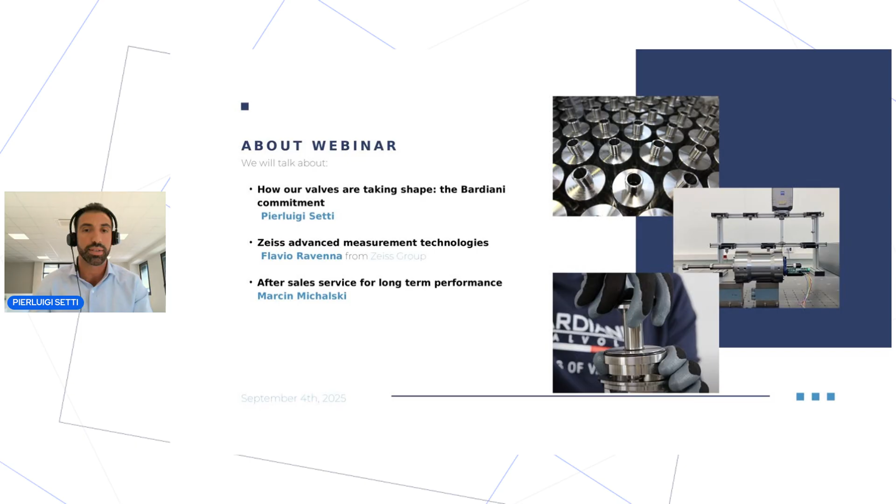So let's start from the beginning, from where our quality starts - the machining process. All the parts in contact with the product are machined from solid bar with no welds, specifically AISI 316L material. Why is this so important? Because we are able to get stronger and more consistent parts. This means no welding points, no casting, no weak points.

I like to share this example. One of our customers, with a frequency of 2 years, keeps looking for replacement seals in order to keep his line running. The interesting part is that these seals belong to valves that Bardiani sold in 1994 - that's 31 years. I can assure you this is not a unicorn case, not a coincidence. This is the result of how we build our products.

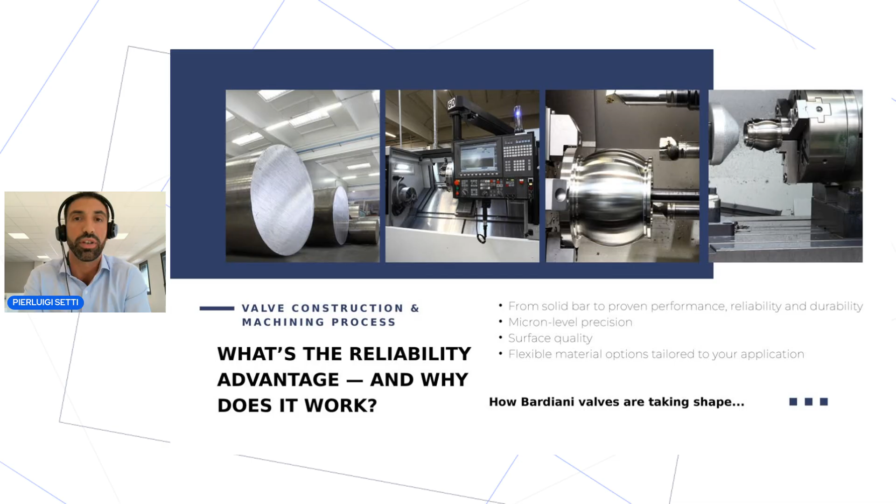Last but not least, flexible material options. I mentioned AISI 316L material as standard, but based on the specific requirements from our customers linked to their real application, we can also propose SAF 2507, 2205, Hastelloy, 904L - a really wide range of options that are part of what I like to call our Bardiani flexibility package. The interesting part is that we do not need any minimum purchase quantity required. We can even design and propose you a single valve with this material.

Okay, so now let's take a quick look behind the scenes and see what happens after the machining, including some key factors related to our products.

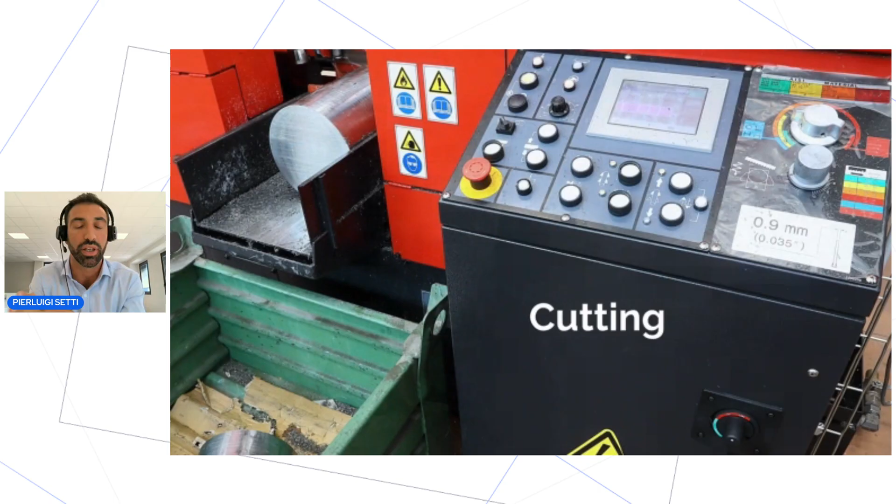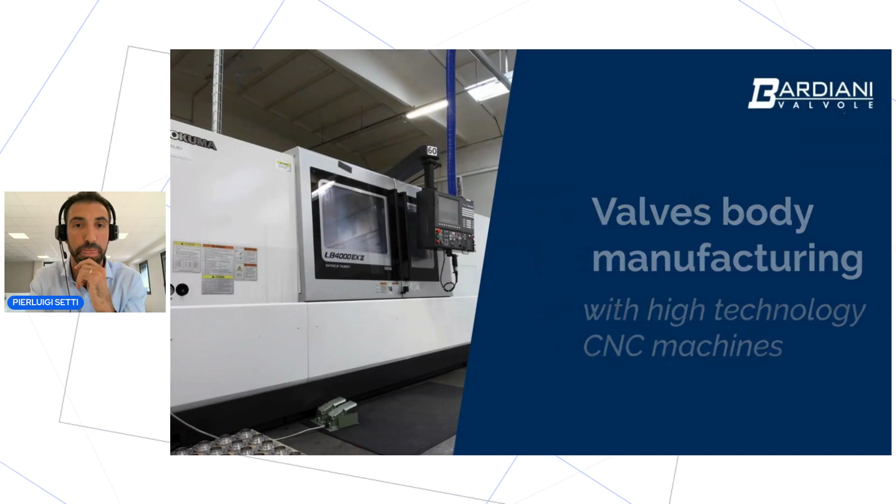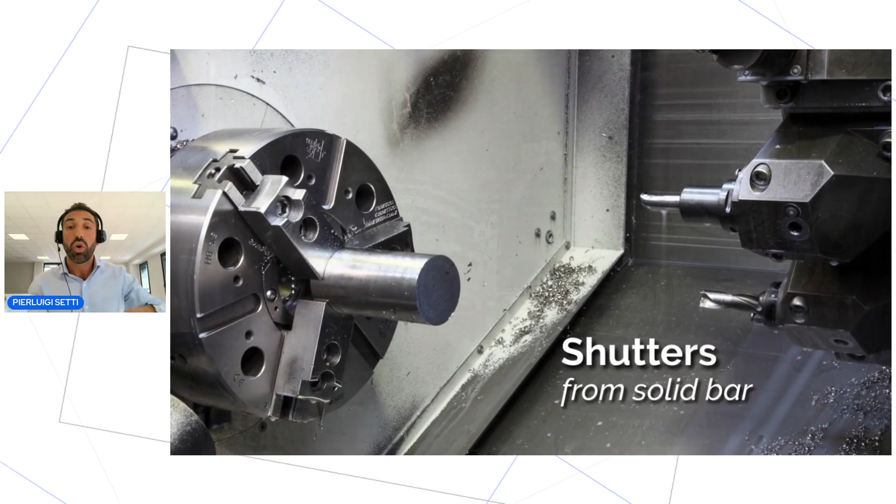So here our Bardiani valves are taking shape. I mentioned the bars, and then the process starts with the cutting. The parts are ready to be manufactured through our high precision CNC machines. We machine both bodies and shutters up to semi-finished parts, because we keep them in stock in our warehouses in order to always guarantee an efficient and performant lead time to our customers.

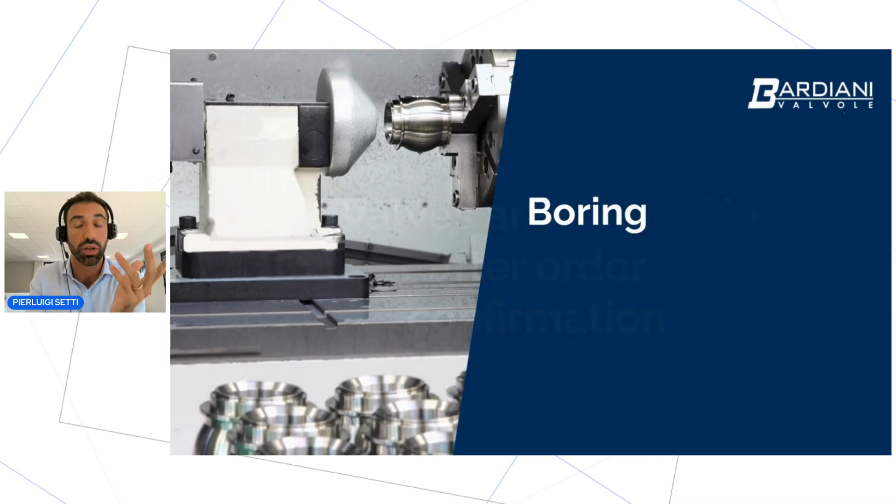We also have vertical automatic warehouses where we keep individual seals or complete service kits. Then the valves are finalized after order confirmation, going through the boring operation, the welding phase, and the polishing.

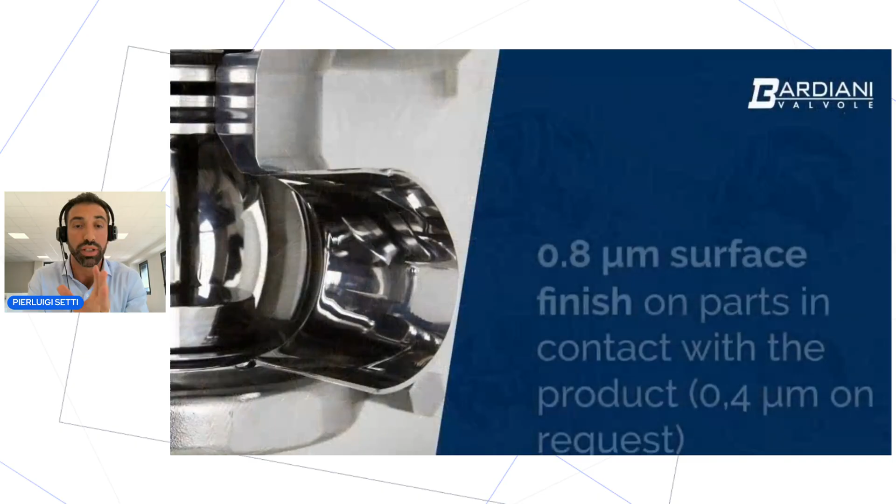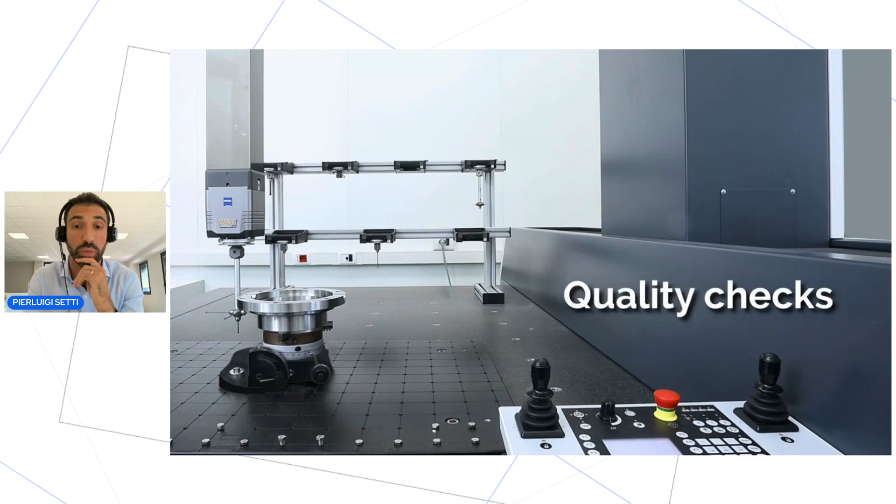As mentioned, our internal surface finish after machining is already lower than 0.8 micron, but for a dedicated request, specifically for the pharma sector, in most cases we can reach 0.4, 0.2 micron. Everything always passes through quality checks, external and internal, assembly, and packing phase.

Okay. So high quality, of course, doesn't come only from the machining. It's an important part, but another important part I would say is the step-by-step prototyping quality control.

This means that basically for dedicated solutions or for new types of valves, we process a step-by-step quality control, starting from the incoming material checks through the in-process dimension quality checks with tight tolerances until the full 100% final inspection. So we are really sure, if we talk about one project, because we can propose this also based on one single project, that really the first valve is exactly the same, even with similar tolerances compared to the last one.

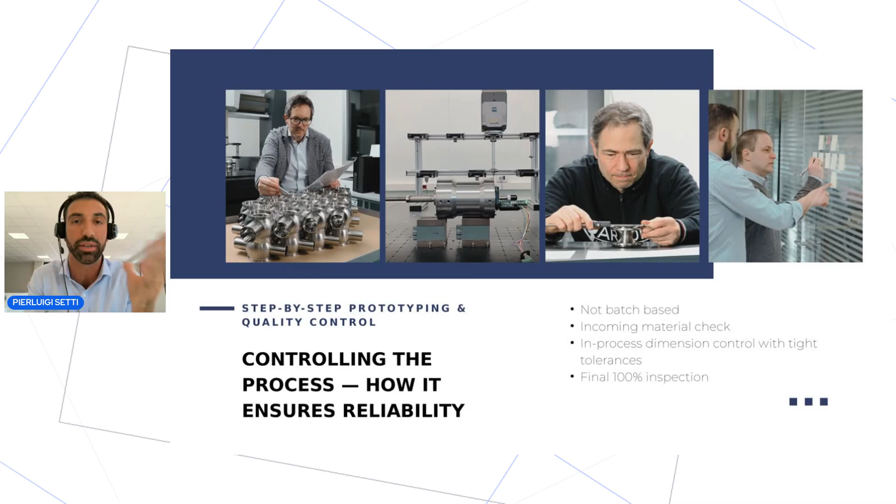So that means really a consistent quality. Well, everything wouldn't be possible without the right partners. So we choose them as carefully as we design our products.

And one of them, one of the most strategic ones I would say, is Carl Zeiss group. Together, we've implemented their high precision quality metrology tools into our quality assurance process. And we're really sure that each valve is within the tolerances, the micron, based on the design specifications.

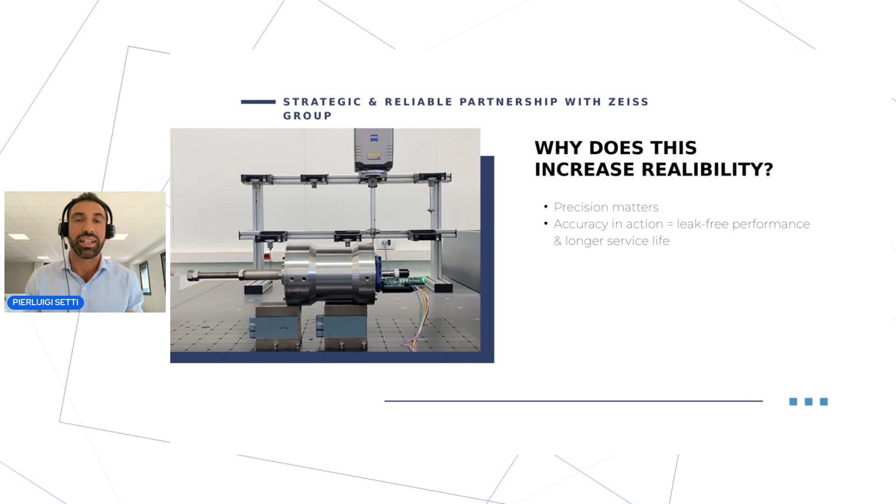Well, I still remember the first time I saw this Zeiss machine in our factory, and I would say it was like looking at a science fiction movie, because it was scanning slowly this small component, part of a bigger mixproof valve. Only after did I realize that really every detail, every micron counts, because this means a much more reliable performance and higher performance, consistent one, and at the end of the day, even a longer service life.

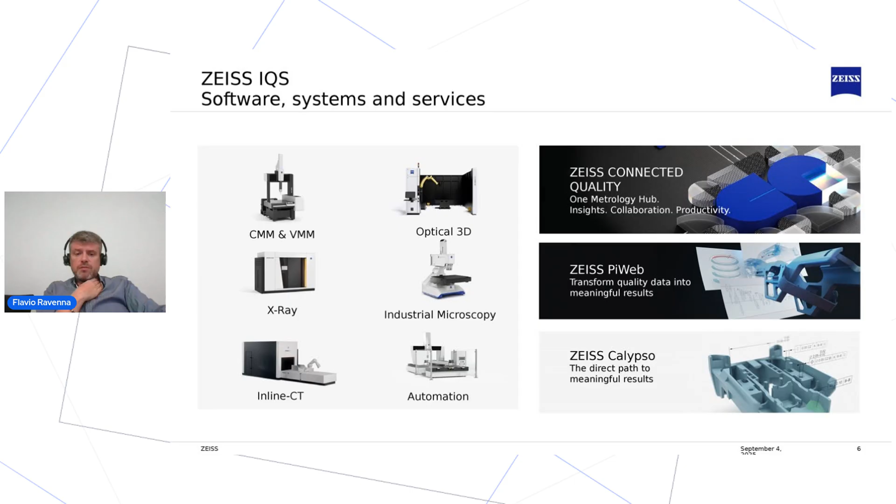Concerning application, basically whoever produces a part can potentially be a Zeiss customer, a Zeiss partner. We can use our equipment for every part dimension, starting from the tiny components installed in a PCB up to a huge blade for a turbine or wind motor. And concerning resolution and precision, we can go down to the nanometer, which, believe me, is really small.

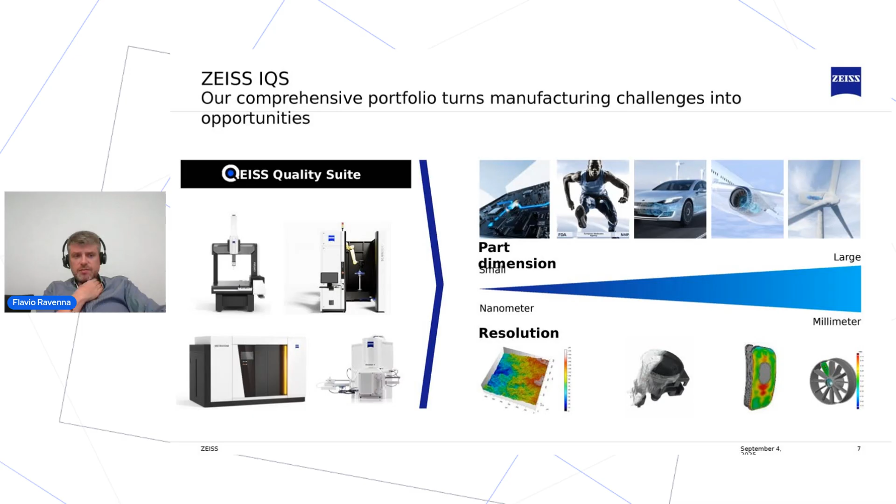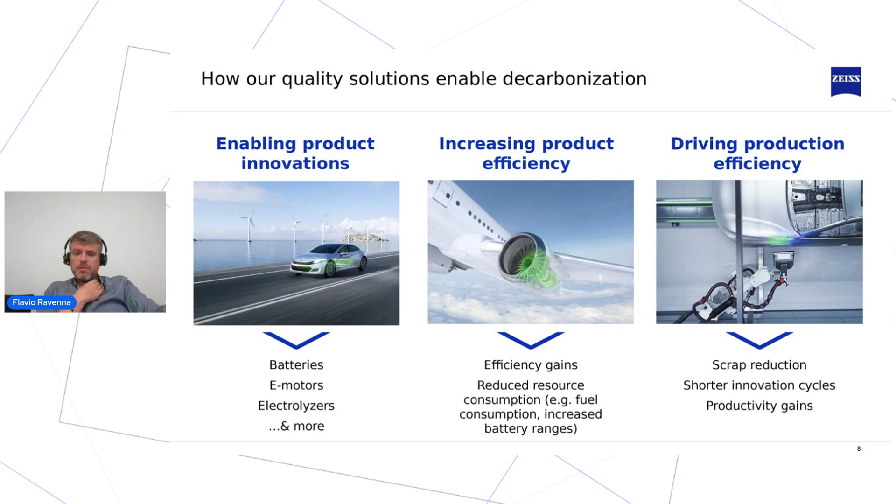In terms of the benefits customers can get from our solutions, we are able to leverage product innovation by checking and inspecting to make it more precise. We can increase the efficiency of our customers' products, again with high quality. And we can also optimize our customers' production processes, for example through scrap reduction or faster inspection.

Another thing I'd like to share with you today is the importance of services for us. We really believe that what's important today is to create partnerships, to give our customers not just equipment but a whole solution together with all the services, support, training, and consulting our customers could need. So we're really looking to make partnerships with our customers.

Speaking about partnership, I'd like to spend some words on the strategic partnership that Zeiss created with Bardiani Valvole. As we've already seen, quality assurance is a key factor for Bardiani Valvole, and this is witnessed by the fact that Bardiani Valvole chose to install a Zeiss Contura inside their metrology room. This brings Bardiani Valvole to automatic inspection control without the influence of the human operator.